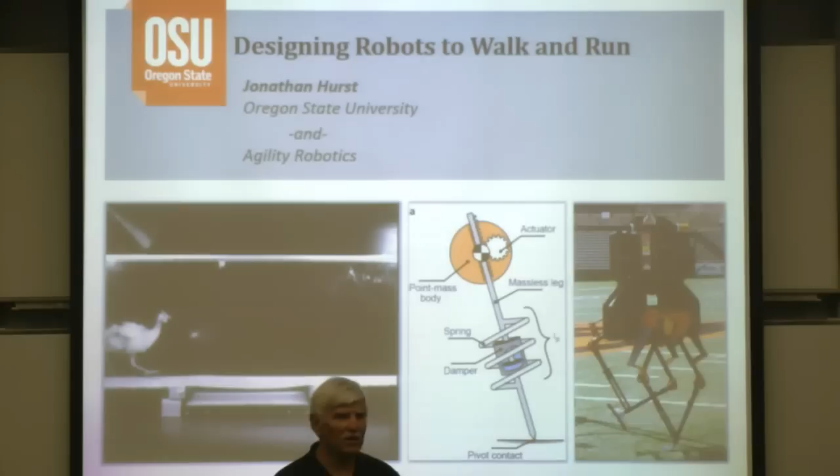Went on for his master's and PhDs, and he always was interested in making robots that could not only walk but run, which is another step above walking, of course. So I think it's time to welcome back to CMU, Oregon State University College of Engineering Dean's Professor Jonathan Hurst.

Thank you, Ralph. This is really great. I spent an awful lot of Fridays sitting where you are, seeing all the people from the robotics community coming through the Robotics Institute and giving talks. I sure have valued the education I got here and been building something smaller but growing in Oregon State along a similar mold. So I'll tell you a little bit about it.

So yes, I'm at Oregon State University. I'm also now CTO of Agility Robotics, where we're transferring this technology into a commercial product. This talk is primarily going to be about how we try to understand things from animals and not copy them. We're just trying to first understand exactly what's going on, exactly why it's happening, and represent that in some symbolic form, some math model, something where you can recreate the dynamics.

And then, based on an understanding of exactly what's going on with this reduced order model or with simplified models that we think might capture the physics of what we see in animals that we want to be able to reproduce, implement it on a machine. And this machine, of course, doesn't look physically or morphologically anything like an animal, because that's not what we're trying to reproduce. We're trying to reproduce the behaviors or the capabilities.

And our approach to reproducing the capabilities is to reproduce the dynamics. And we're building it out of electric motors and carbon fiber and things like that instead of muscles and bones. So I'll repeat that idea a bunch of times throughout the talk. I'll start with a little bit of background about myself, I think. Maybe.

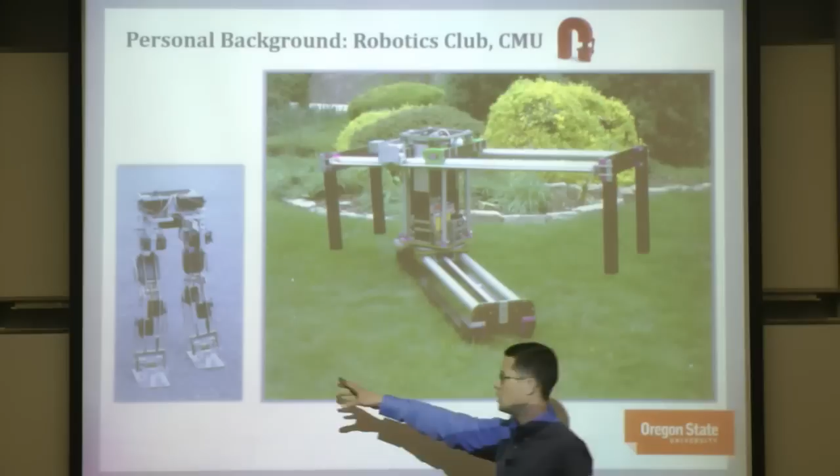There's the frame walker that Ralph mentioned. That picture was taken right outside of FRC. And a little servo-driven robot that primarily taught me that robots are hard. I mean, it did not work.

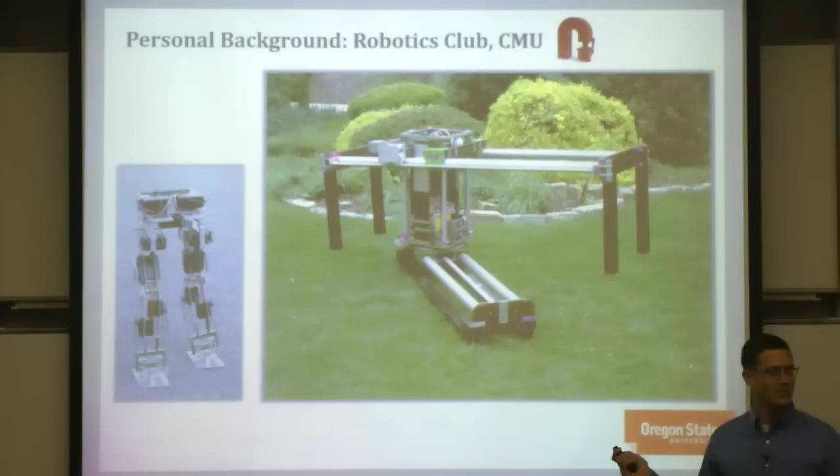The frame walker is still in the robot farm. Oh yeah, I think they mounted that up on the wall. Right above the 100-year-old lathe. Nice. It's not 100 years yet, but that was fun.

That was a lot of my life spent down in the basement of the Field Robotics Center building this thing for a couple of years. In Ralph's lab, I worked on this, the actuator with mechanically adjustable series compliance. The idea is that this is a joint, a knee joint out there, and like a thigh. This would be the hip joint. Prototype leg, where you can change the co-contraction of these antagonistic springs and change the physical stiffness out at the end.

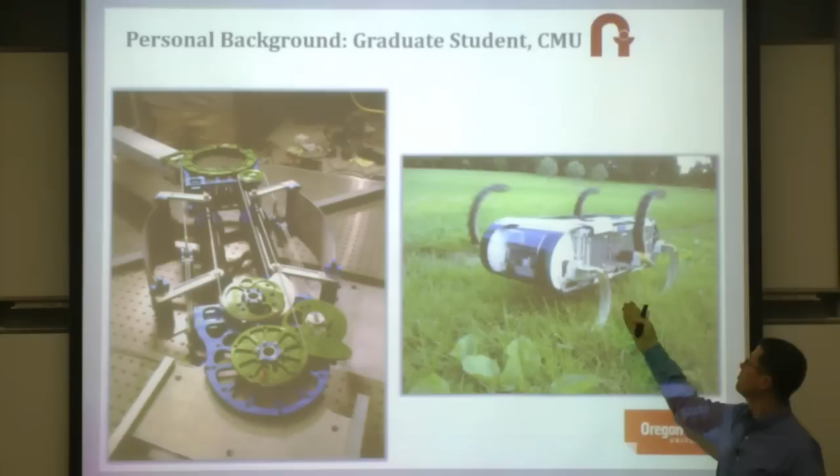Until I learned that there's no reason to do that for walking and running. But still, learned a lot. I also worked on the RHex robot. I just saw this one in Ralph's lab, but that picture is 10 years old or more. And that was great. And I built Mabel and Thumper.

This was working with Jesse Grizzle at the University of Michigan. The deal was I build and deliver a robot to him so that he can do controls, and he buys enough spare parts that somehow ended up in my lab that I get to have a monopod and hop that around and finish my PhD work and my thesis work with that. So then I spent a lot of time down here in A level in the corner.

So we're growing. We don't have, what do you have, 100? It's not a competition. It's not a competition.

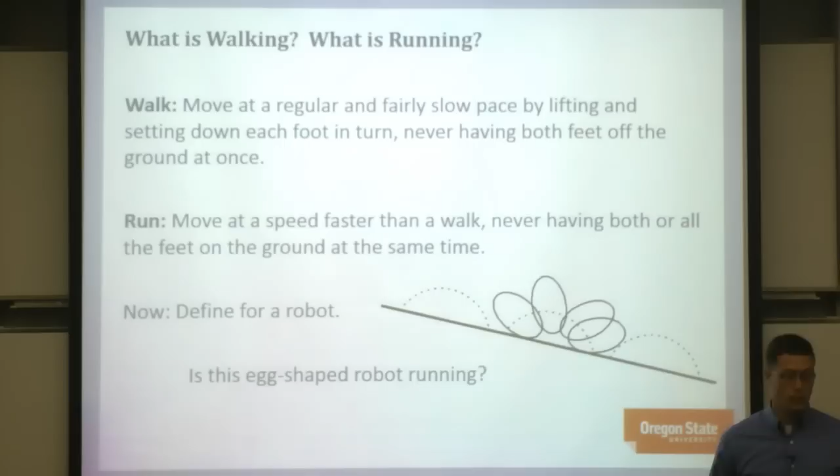So the reason I bring that up is because our goal is not to walk or run. We're not trying to make something that looks like an animal and looks like it's walking and running by some definition. We're trying to meet or exceed performance goals. And this is an example of a performance task.

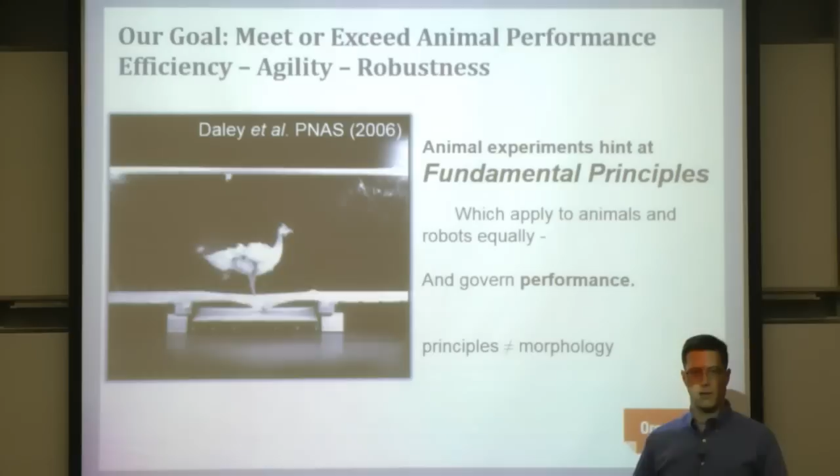This bird, a guinea fowl, is running down a runway that it's been down 100 times. A piece of tissue paper has always been over that spot on the ground, and up until this time, there's never been a hole there. It's been able to just run over that spot. So this bird has full confidence that it's just going to run down the runway, motivated by that broom that's chasing it.

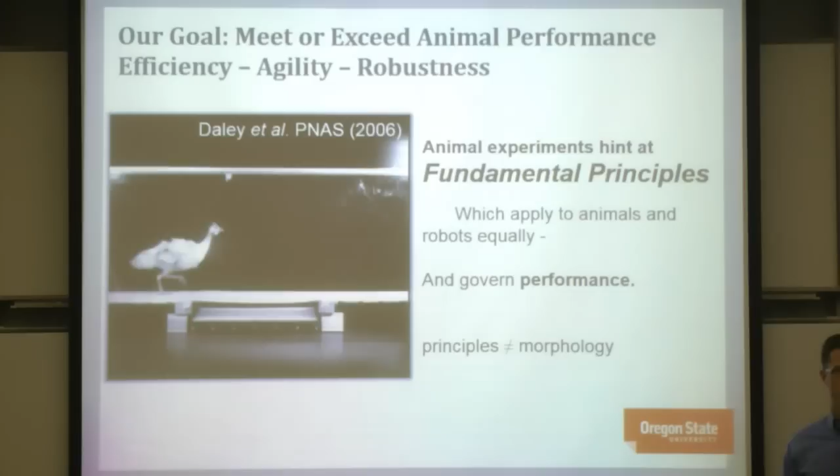This time, though, its foot just happens to break through. And you see it really doesn't disturb the gait hardly at all. I think that's amazing. The unexpected pothole is 40% of the leg length. And these birds run on birdseed. They're incredibly efficient, and they are very robust. They're versatile; they can go lots and lots of places. That's what we want. We want those achievements.

The way that we approach this is looking at how exactly it's able to achieve that, trying to hypothesize, collaborating with Monica Daley and other people in the community, to get out these key hints and principles about what they are doing. Fundamental principles like this should apply equally to animals or robots. So if you think you understand it in an animal, you should be able to reproduce it in a robot. I don't see why not. Again, principles and morphology are not the same thing.

I really think because walking is so familiar and you see it everywhere, and say a baby giraffe is just born and gets up and walks, people think it's easier than it is. But there are millions of years of evolution behind this. It's built in. It's built into neurons. It's built into the physical hardware. So how do you design and build something from scratch to do this? We just don't understand how to do it.

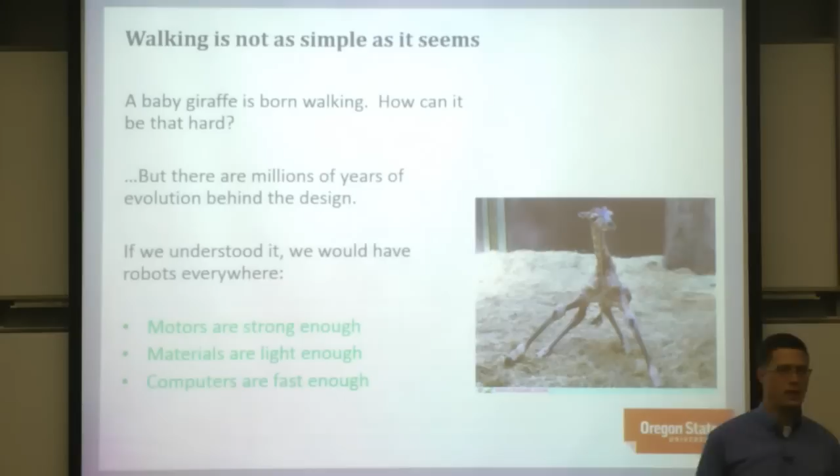I really think if we understood it, we'd be able to do it. Motors are more than strong enough, materials are light enough, and computers are fast enough. So it's not the technology, it's not the engineering that's the impediment. It's knowing how to implement it, how to do it right. We clearly don't understand it.

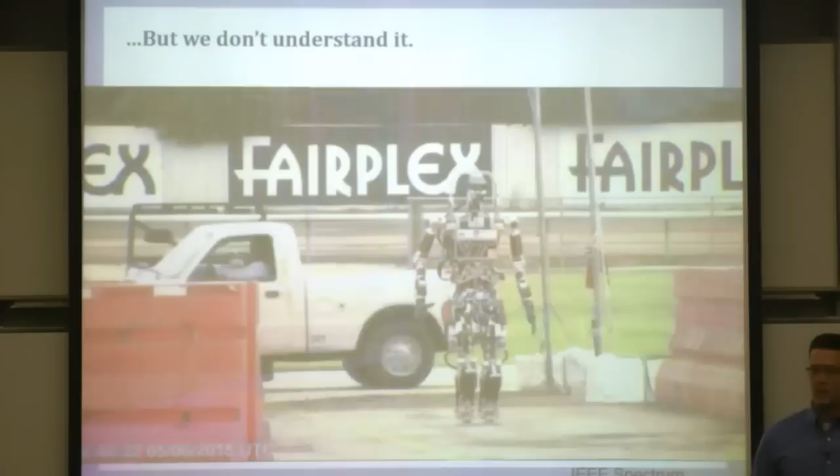You've all seen this, so I won't linger. But I'm sorry, they don't show that robot actually getting back up. This is still a great achievement. If you're a roboticist, you look at the whole thing and it's pretty impressive. But to the outside world, this is disappointing after watching movies. If we really understood how to do this, it wouldn't look like this. Okay, so skip the rest of those.

If we really understand it and can make robots that can go anywhere people can go with the same efficiency and versatility, I think the impact is going to be huge. We're going to see this in every aspect of life. Of course, prosthetic limbs, making people close to able-bodied again, or even better than able-bodied if the robot has a little more power, so long as it's actually behaving like the biological limb and is able to coordinate with your body well.

A lot of that is all about the dynamics and understanding the physics of how it works. Or exoskeletons. I imagine, I hope, I believe actually, that wheelchairs are going to be an anachronism someday. And you'll be able to put on fairly unobtrusive, lightweight exoskeletons and get around. But we're going to have to understand how to do that, how to not treat the person inside like a puppet, and instead be able to work with the biology right there.

But I think the biggest and the most important application that's going to affect the most lives, that's going to be as, I don't know, everybody's got a smartphone, it's going to be that kind of thing, is having the robots that can go in buildings and outside and just go anywhere. The mobility, solve the mobility problem of machines.

If you watch the first half of the movie I, Robot, it's really a utopia. It's really a great story. You just have to stop when all the lights turn red and don't watch the rest of it.

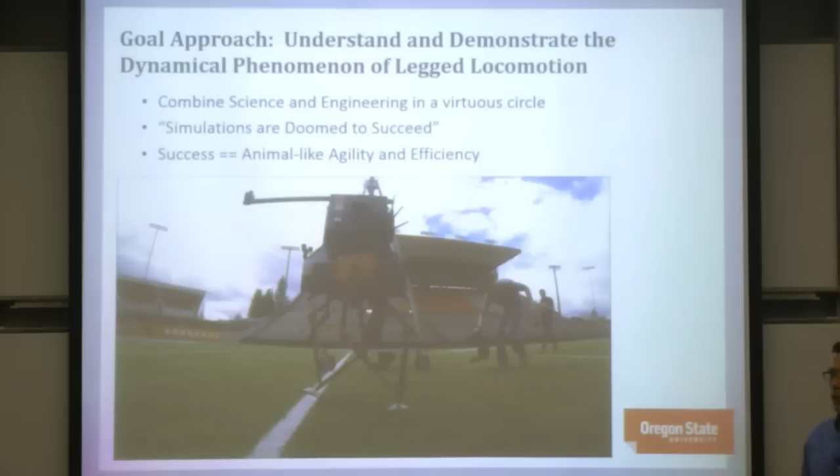And I worded this specifically, the dynamical phenomenon of legged locomotion. I think of legged locomotion the way you might think of how a mechanical clock works or a grandfather clock. That has inherent stability for timekeeping based on a pendulum or a spring and a mass. And that's something that exists whether you understand it or know about it or create it or not.

If we wiped out all knowledge of how a grandfather clock works, people would very quickly discover it and find that a pendulum keeps time and things like that. I think legged locomotion is exactly like that, but it involves springs and masses and a lot more complexity than something like a grandfather clock.

I don't think that you can explore this very well in simulations. I've seen many simulations of successful machines walking and running around, and if you dig down enough, you find some simplifying assumption that isn't feasible or realistic. Doing it on a machine forces you to go in certain directions. So I think we're just beginning to really understand this integration of passive dynamics and applied control and how it applies to legged locomotion in particular.

Now I know a lot of you in this room, this is probably old news. A lot of you I've seen at conferences, so you've probably seen me say this many, many times. But just to be clear for everybody in the room, the passive dynamics are any behavior when the power is off. If a person is unconscious or the power is off, however your machine operates, the inertia of your rotors, any stiffness in the system, any friction in the bearings, any backlash, that's all passive dynamics.

That passive dynamics can either help your task and contribute to achieving what you're trying to achieve, or it can be an impediment and really get in the way. And so when you design a robot without thinking about your dynamic behavior, you design it with kinematics first, then you say, now I will build a model of my robot and try and control it. The odds are that those passive dynamics are going to be an impediment and a problem that you have to try and control around.

Applied control is, of course, the little additions that you give. So that's my daughter Jane. And on a swing, you learn to pump the swing. That means you have to give it just a little kick each time. It's not a lot, but you're relying mostly on the dynamics of the pendulum in order to create the particular motion that you want. You're not intentionally creating this trajectory or doing path planning for a specific trajectory.

So I think similarly, it's kind of crazy to try and do trajectory following for a walking robot. It's just not like that. It's a dynamical phenomenon. Another one of my favorite.

Yeah. Oh, can I ask you a question? Okay. Thank you.

So you mentioned that you don't have to do trajectory following. But obviously when you're swinging freely, it's more of a natural phenomenon. But if you're walking on steps, or if your daughter is jumping over things to get to a destination, doesn't she have to do some planning?

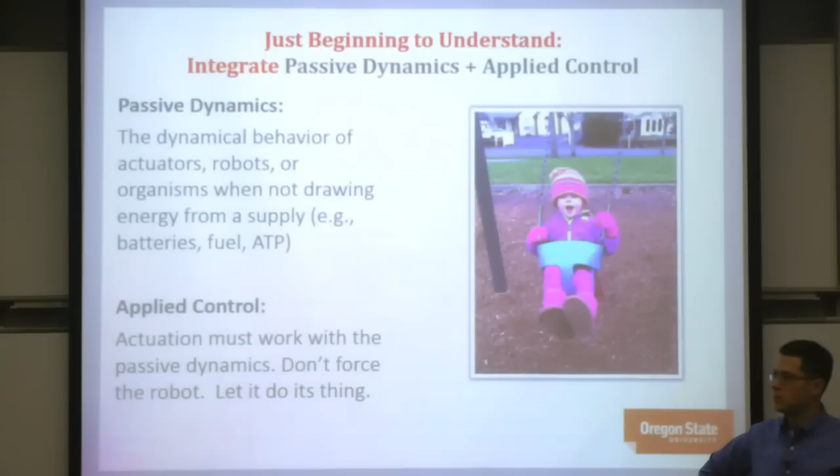Sure, planning is involved, but I think it's more like Mike was showing me in Ralph's lab at the BallBot, where you think about planning through your dynamic state space. So you have to know what the dynamics are of your machine, and you kind of want to create the dynamics of your machine to help do what you're doing.

So she has some trajectory here, which is probably phase locked in some way to the passive dynamics, and picks a time to trigger when you choose a trajectory for the pumping of the leg. So there's always planning, choosing when you're going to do that, and there's probably trajectories, but it's not the high-level trajectory of 'I want my swing to do this thing,' and then forcing it to do that, even though applying torques to the bar may or may not fight with the passive dynamics of the pendulum.

So what I'm trying to suggest here is that all of these dynamical systems are going to be an integration. They're going to be a partnership between the passive dynamics and the controls. And it's very important to think carefully about what passive dynamics you want for the task you're trying to achieve. Does that answer the question?

Great. Okay, so I think I've got a couple of videos here that I think really illustrate that combination. I think this guy is obviously aiming a little bit. You can't miss, you have to catch. But it's a pendulum, and notice a couple steps at the top right there.

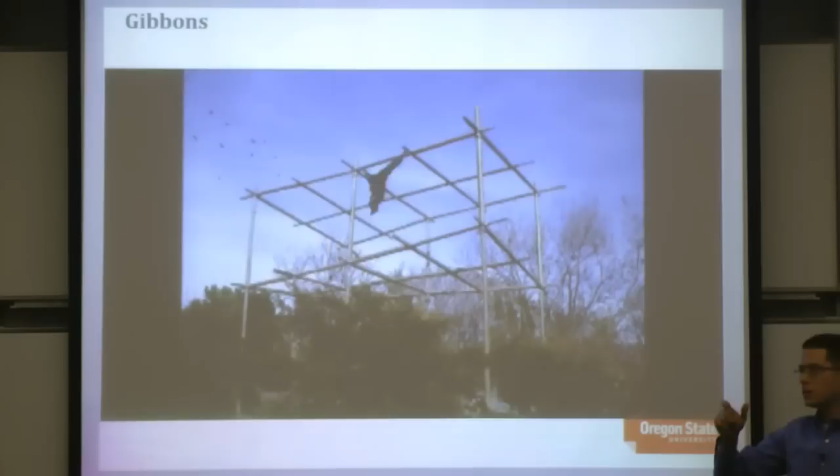It swings from brachiation to walking. It shows, I think, a lot of similarity in the springs and the pendulum between those motions. They're very, very similar.

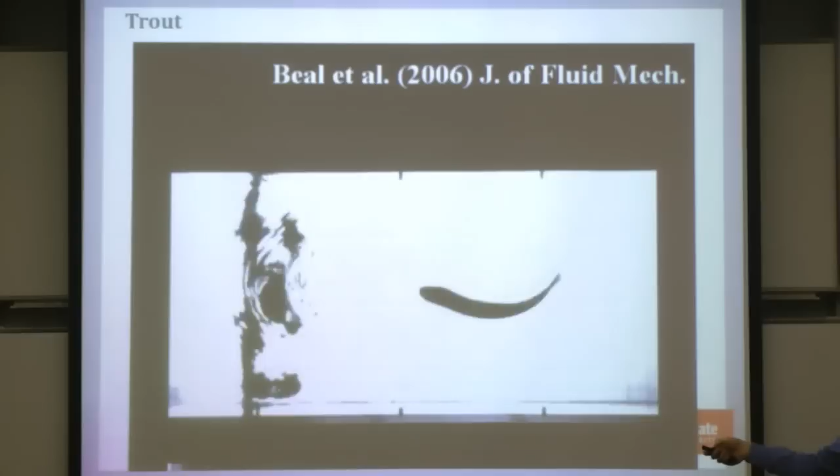This fish is 100% passive dynamics because it's swimming upstream - there's a little rock right there. It's actually dead, it's a dead fish that's swimming upstream. And if it had controls, it would know to just kind of nudge itself and nudge those passive dynamics to keep that under control and keep that going in the right way. But it's dead.

So specifically for legged locomotion, these are the passive dynamics that I would like to tell you as fact, but I expect a few people would argue with me in this room. These are the passive dynamics that I believe are the foundation of legged locomotion: this spring mass behavior.

Now, this theory showing that the bipedal spring mass model can reproduce the characteristic ground reaction forces for walking and running, that was Hartmut Geyer - in 2006, that's not that long ago, is the very first time anybody ever said that. That's amazing to me. This is a theoretical result that even though people have been thinking about walking and running for centuries, probably millennia, I think this really kind of cracked open an idea that's important.

Now, we looked at ostrich, turkeys, guinea fowl, pheasants, and quail. This is with Monica Daley. And look, this was hundreds of experiments, hundreds of runs of data.

And my student Christian Hubicki put together this very simple reduced order model with the idea that birds don't actually look like this, or animals in general don't actually have this perfectly symmetrical spring mass gait. There's always this little tail going right there. So what's our theory for that?

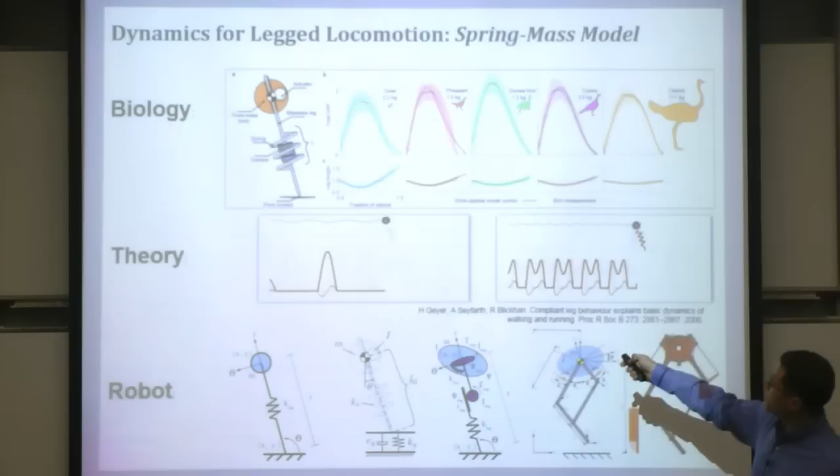And a little bit of damping - everything's going to have a little bit of damping. He put together a really simple model with a little bit of damping and an optimal work actuation in series with that damping, and showed a very good match to this data for this huge range of birds. It doesn't prove anything, it just says here's a model that can reproduce the set of data that we took. But it's our best guess that this is capturing the real physics of what's going on in the system.

So that's what we wanted to show with the robot: is this just a model that maybe reproduces some behavior, or is it actually capturing the physics and the fundamental principles behind it? So we start with a simple model, get a little bit more complicated, a little bit more like a robot, and we end up with our prototype robot leg.

So here I'm going to make an argument. This is straight out of my thesis.

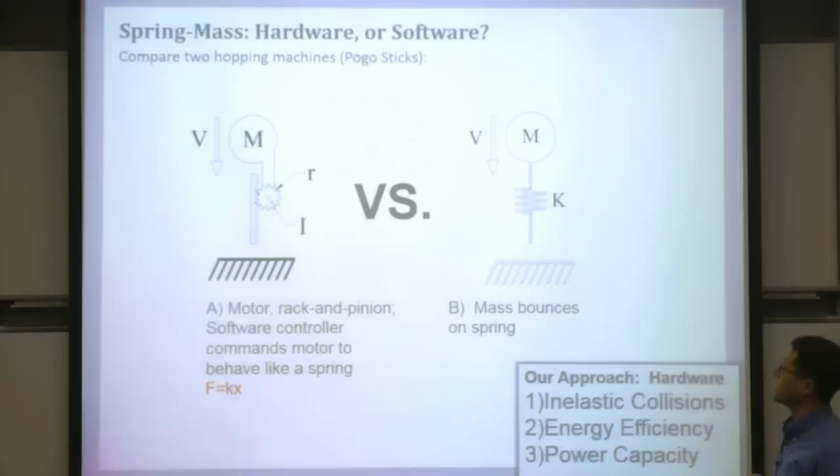I've made this argument for years and years, but it's important to keep repeating. The question is, do you want to create this spring mass behavior we just described? Maybe I've convinced you this is an important foundation for legged locomotion.

If you had really great actuators, you could control that behavior in software and get all the behaviors you want. Maybe the spring mass is the way to do it, maybe something else is. Or you can build it in hardware, in which case you're absolutely stuck with that passive dynamics behavior. And if that passive dynamic behavior gets in your way, tough, it's just going to limit your abilities. So there are definite trade-offs between doing it this way.

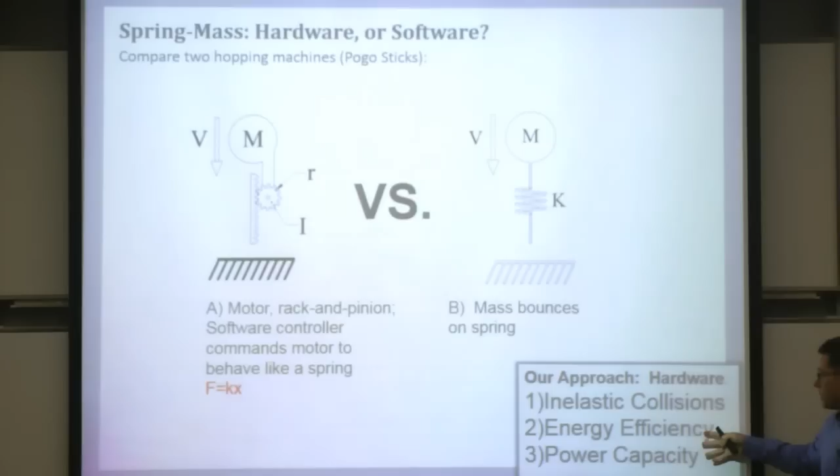I want to tell you why we do it this way, why we put the spring in the hardware and implement the passive dynamics through the physical system. Basically, it's about the collisions with the ground, energy efficiency in the system, and power capacity.

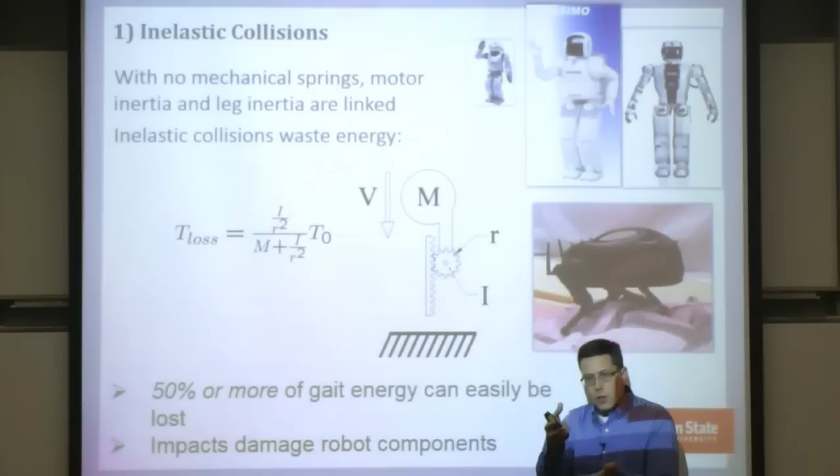Starting with the inelastic collisions: if you ignore any sort of mechanical springs and think about this simple system coming toward the ground with this velocity, here's your motor and a gear, and it's not spinning at all. At the instant before impact, it's stationary. The instant after impact, it has some rotational velocity. That's an inelastic collision, and that equation describes the energy loss to that inelastic collision.

On something like Asimo, with a little motor and a 100-to-1 or 150-to-1 gear ratio, the reflected inertia, the effective inertia you feel, is about the same order as the mass of the robot. So you lose more than 50% of your energy at that instant of collision. That's ignoring the fact that you get a very large force spike that's likely to break a lot of things. So when Asimo tries to run, it's very hard on the robot just from those inelastic collisions.

It takes a lot of power too to get you off the ground. I'll get to that.

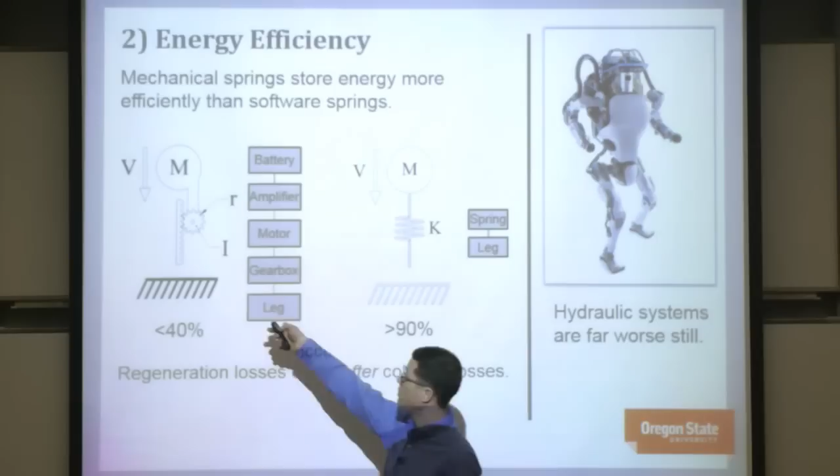Energy efficiency: if you're trying to do regeneration, remember, after your collision losses you still have maybe 40% of your gait energy, and that's in the velocity of that motor spinning now. You want to reduce that speed and then accelerate your robot back, so you want to take that energy, store it, and give it back.

If you need to go through your gearbox, your motor, your amplifier, chemistry, and battery, and then push it all the way back out, your efficiency, if you're Sangbae Kim, is pretty good, because he was very careful about all this on the Cheetah robot. For most people, that's in the 10% range - it's very hard to get that efficiency to be decent. On a spring, if you're Ben Brown, you get better than 90%.

And then the power capacity is really a compelling argument. When you lift off the ground and you're bouncing, that's high force and high speed - it's a very high power motion.

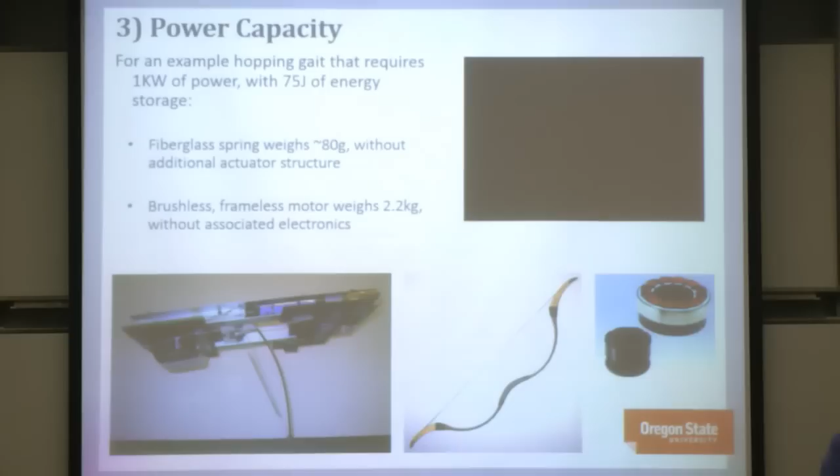For a tiny little spring, you only need about 80 grams to do something like 75 joules - I chose something like a 60 kilogram robot hopping a certain height just so I could do the comparison. And a motor, just the motor, without housing or bearings, is about 2.2 kilograms to get the same power output. It doesn't make sense to try to generate your power output with an electric motor. It makes a lot more sense to use springs to do what springs are good at, like high power, and use motors to do what motors are good at, which is continuous power output.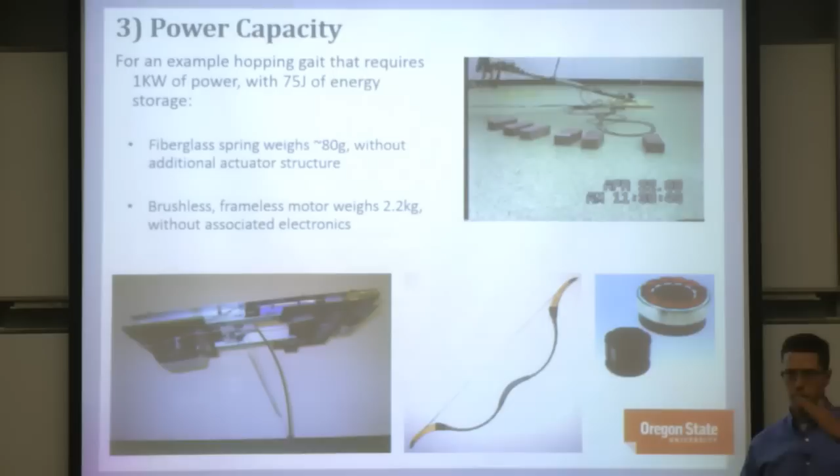Hopefully you've all seen this before: Garth Zeglin and Ben Brown's robot from a while back. This and the ARL Monopod 2 are kind of my background. I don't really buy in much to the humanoid robots.

So I've already said this is our approach. Others have taken this approach too: passive springs in there and a very small motor to kind of keep that passive dynamic behavior going.

Back to Marc Raibert doing this stuff with air springs and hydraulics - look at what that did, no robot's ever done that since. It did a flip. Now when was this, 1994? And they had robots running at 10, 15. Why isn't everybody copying this? I don't understand. People still build humanoids that do this kind of walk, and I don't understand.

So this is our machine, ATRIAS. The whole concept behind ATRIAS is that we have a simple math model. That's the model that we think we understand, that's capturing the physics of what animals do, and that we think we can control. Let's build a robot that is as close as physically possible to that model, be about human scale, and be out in the world. And that's where ATRIAS comes from.

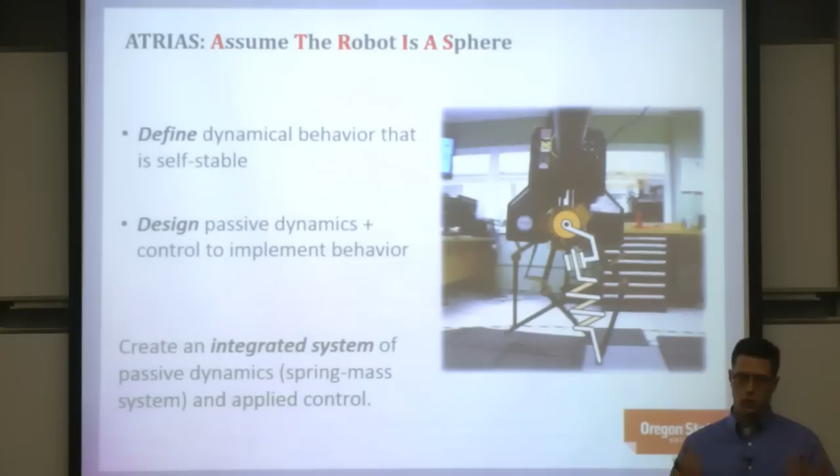Assume the robot is a sphere. The idea is we really can just assume the robot is this simple dynamic model, apply the controller to the simple dynamic model, and it's going to work on the robot. That's the idea.

Define the behavior that you want, and then design the passive dynamics to work with your controller to integrate that behavior. So it's very much an integrated system.

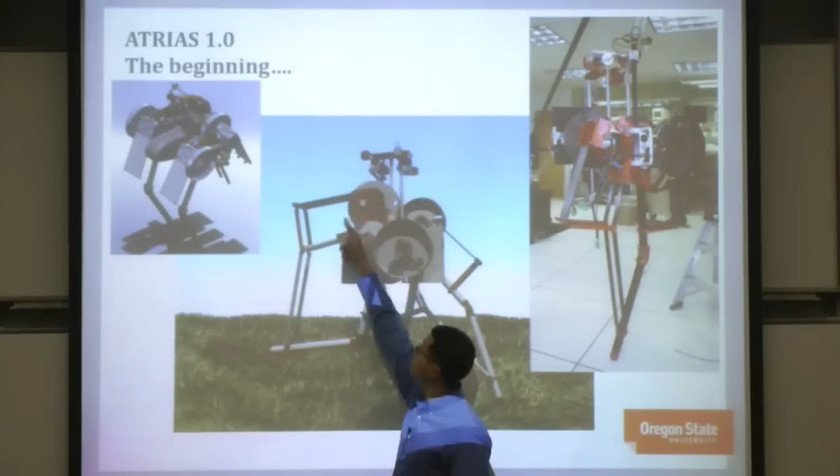In the beginning, when I first got to Oregon State, this was a cable drive. The motor is here in the center, large pulleys here, and then these are a step down, and they spin around the motor housing, like a planetary gear. It's all cable drives, no gears anywhere on the robot.

We built a prototype, and we did have this hopping around the room. Now the problem with this machine is this whole dinner plate sized pulley sweeps all the way around here and all the way back. It's very difficult with the robot if you want to do adduction, abduction, not even turning, not even yaw. There's this huge keep-out space where these dinner plate things are spinning around. We can't figure out where to put a body on this thing. There's just too much space.

It was too big. It was a problem to do cable drives. We could not figure out how to get cable drives into a form that would work. So we reverted to these harmonic drives, which are terrible. I hate harmonic drives — 60% efficient or something like that in our application because they're small, with very high torque capacity and so on. But they did work. They did get the job done.

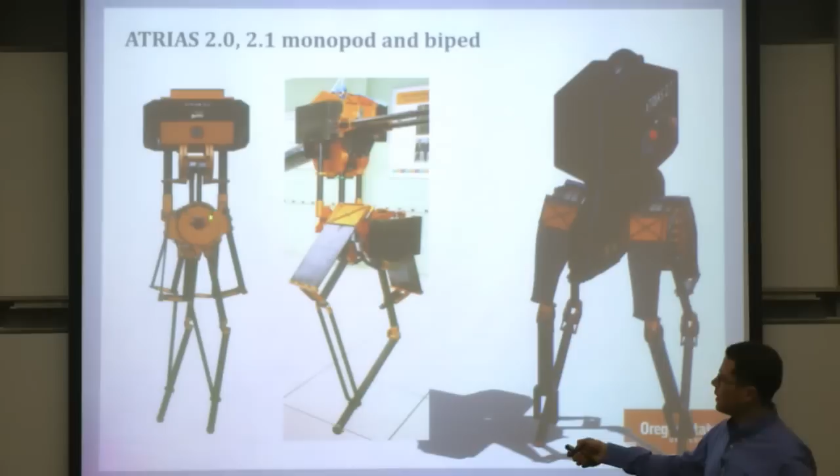So we have these big motors in there from Emoteq right in the core, and then this 4-bar linkage for the leg so that the leg can extend and retract like this and swing back and forth like so. And these big plate springs, fiberglass plate springs, for containing the energy of the running gait.

Started building. There were a lot of parts, a lot of machinists, and we made three of them. One of them, many of you have seen it in Hartmut's lab. One's at the University of Michigan, and we have ours still at Oregon State.

We traveled a little bit with it. We did take it out to the Royal Veterinary College and do a photo shoot. This is the runway — had the robot run, and I think this was the first time the robot walked outside. The reason we had the robot walking outside this early in the project is because they couldn't, for some rules or reasons, get the rope attachment to the ceiling for the boom. So they took it outside, wrapped a rope around a tree branch, and just walked around out there.

It worked. Okay, now I get to the actual technical content of the talk. I've given you the background, I've given you the foundation of what it is that we're trying to do, the approach we're trying to do. And I want to tell you how we control this thing.

It's a lot more based on understanding the physics and having that understanding of how you want to control the physics and the passive dynamics than it is about a closed form controller. Now there's a lot of detail behind this — a lot of pretty good control theory and computer science that my students do, because I don't know how. But I do have good intuition for the dynamics and how these things move. And these are the key pieces that enable the robot to function.

So to start with, of course, we made a spring mass model, with near massless legs — that's why our motors are right here. These are very lightweight carbon fiber. The leg springs, the mass is concentrated all right here. The center of mass is right about there. We couldn't quite get it down to the middle just because we needed our computer and batteries and everything.

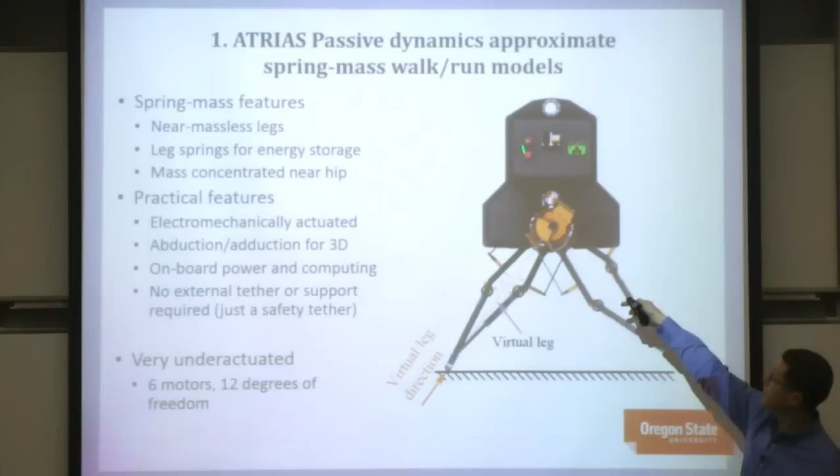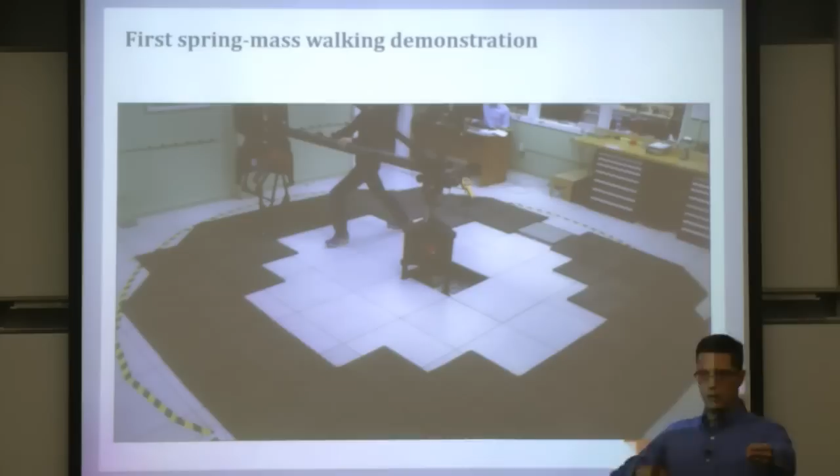Practically though, we have motors, we have adduction, abduction, which is not part of the model—all the overhead you need to keep a robot going. In this very first demonstration, he's holding the length of the motors constant, so the motors can't change leg length, or at least the tight PD control is holding leg length constant, and applying zero torque at the hip. It also follows kind of a clock that matches where you are on the gait and keeps the other foot there, which is why he has to push it to walk around. So that's all the controller is doing: zero torque at the hip except for placing the leg and holding leg length constant.

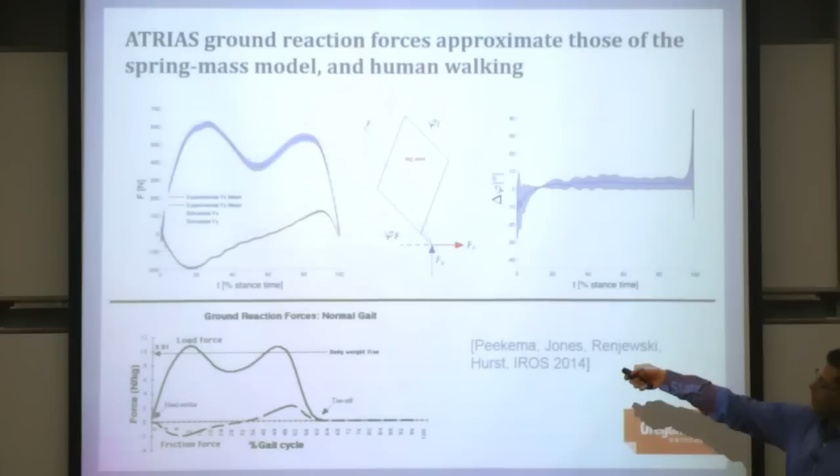And there's what we get. Just using the spring mass behavior, pushing it around the room, we get the characteristic spring mass walking gait behavior. That dotted line is what you get from the theory, the solid line is what we get from our robot, and that's what you see for a person walking.

Now the first thing I get a lot is, who cares? So what, you've demonstrated something that looks like a person, but why does that really matter? Well, it matters because of what it can do, but I'll get there.

Here we are doing the first passive hop. Same idea, holding the leg length constant, holding zero torque at the hip, and just throwing it. Looking at the ground reaction forces, there's what a person looks like—they have a heel strike. Our robot doesn't have a heel, so we don't have the heel strike, but for the most part it's pretty close to what this spring mass model does.

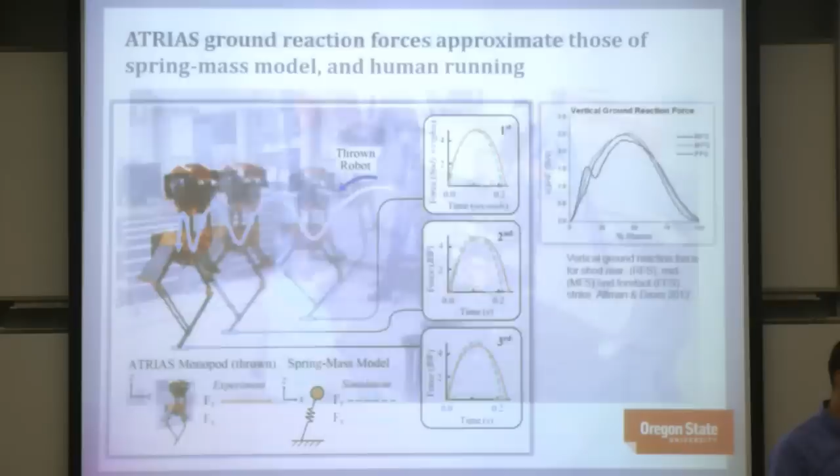So that's just to show step one, the robot is a spring mass system. Step two, we had to mix time-based control and state-based control. There's a lot of flexibility in the robot, and if you try to do closed-loop control of this thing, it's very hard to have enough bandwidth with your actuators, given how much inertia they have, to take any oscillations out of the springs. So we don't even worry about it.

What it's doing is just stepping side by side, which is a feed-forward clock trajectory. Maybe some people would call that CPGs—I had lots of names for it—but it's just a time-based controller tied to state-based control. In this case, the state-based control is the velocity, so it places the angle of the leg based on the velocity of the robot, and it just stands there and steps side by side.

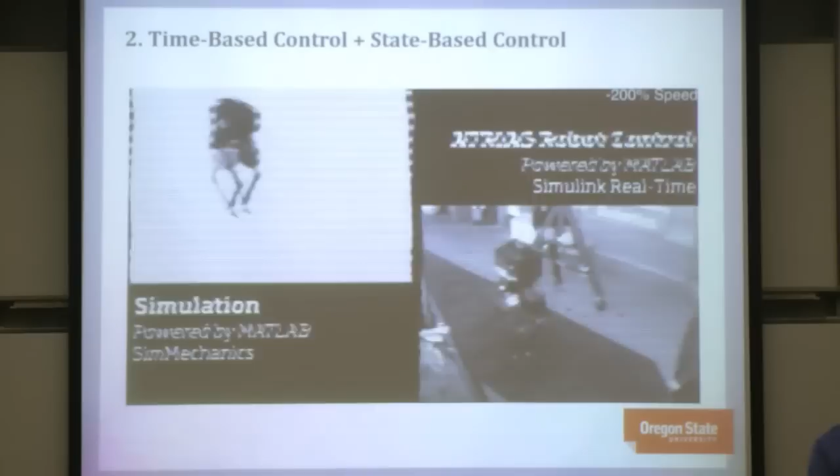Now it has no feet, so it has to do that. If you had no feet, you would also have to do that, and you can try this by wearing stilts. To visualize what it's like to be the robot, wrap yourself in a carpet so you can't see anything, so you can't use your arms, so you can't really bend your body very much, and wear stilts. Then let somebody randomly kick you every now and then. If you have all of those caveats, the robot does pretty well—people can do about that well.

Hybrid transitions are a real challenge. Have many of you run into this before? At some point you're going to have an impact and you need to change your control from one phase—until after the impact, a different phase, a different control method.

We don't have any sort of toe switches at all here. We do a very gradual transition. We have the swing phase control and the stance phase control, and they're different. Both controllers are always running, and each has an influence proportional to the amount of force being applied on the ground, because we can measure that force.

In the swing phase there's very low force, so the swing leg control is really the one that controls the torque on the motors. When you pick your location, both controllers' desired trajectories are pretty much tangent—about the same for a good region at the start and end of the stride. So it doesn't matter when you hit the ground; if you hit early or late, the controller was going to do the same input anyway.

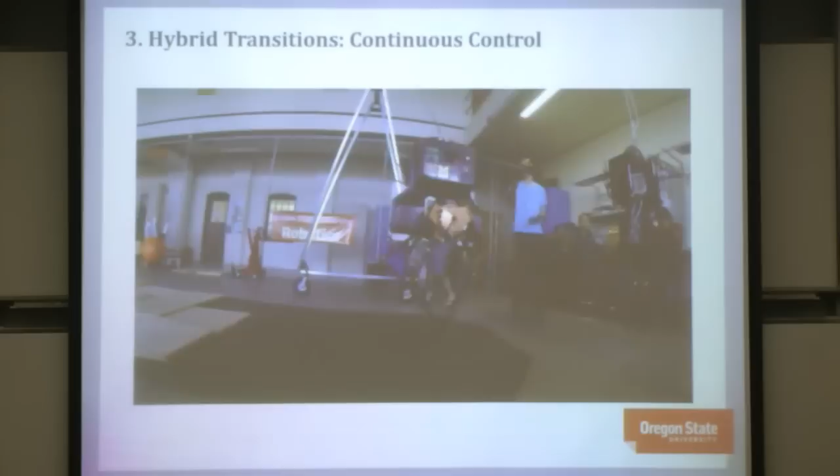And just based on the physics, the behavior or the response is going to be different because now you're applying forces or you're not, but the controller is not doing anything different. So there is no discrete transition at the hybrid transition from swing phase to stance phase. So it doesn't know that these obstacles are here. We just tell the robot that there's flat ground, walk forward, and then it goes. And you can handle quite a lot of disturbance that way.

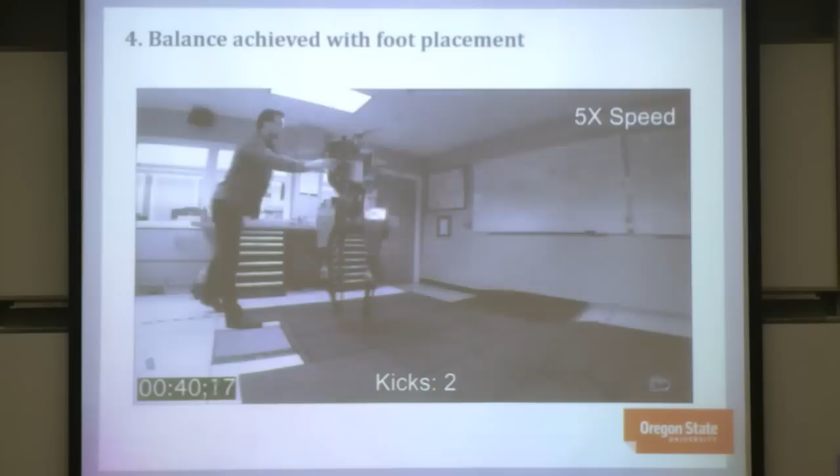And this is showing that if you think about the velocity vector and just visualize how that velocity vector changes. When it gets a kick, the velocity vector increases. And then in your mind, think a direct proportional controller between velocity vector and leg angle. That's it. Very, very simple. We're controlling the leg angle based on the velocity vector of the center of mass.

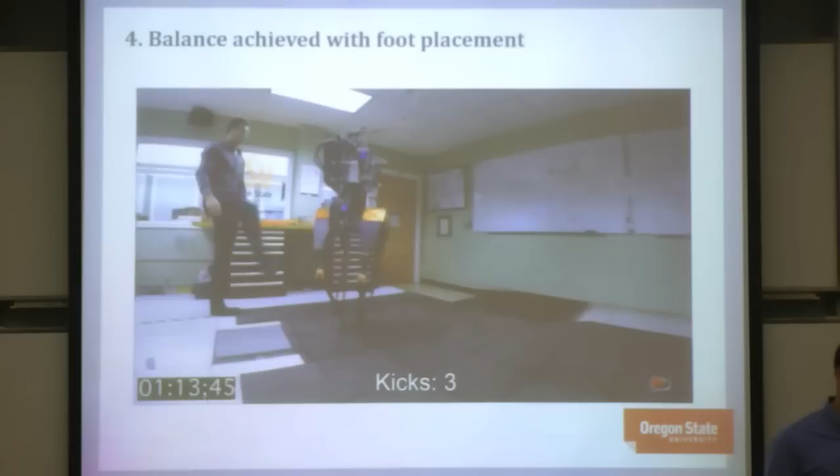Now, calculating that velocity vector is less easy. It has to do with measuring the angle of the body and the proprioception of the rest, and filtering out a lot of the vibrations and oscillations and things.

And energy regulation. Now, we thought a lot about this, about how do you control your velocity, how do you control your hopping height, how do you control the different features that you might want in a gait. And what is really the one thing you care about is probably the amount of energy in the gait. So you think about this from the spring mass point of view. The spring mass system is energetically conservative. You're just redirecting that energy all the time between the spring, the gravitational height of the center of mass, and the velocity of the robot. And so you want to steer that energy through your system.

You can control your hopping height by changing your forward speed. So slow down your speed and your hopping height is up high. You can then transition all of that to forward speed. And I've seen this at the aviary, the National Aviary here.

There were a lot of really tame birds, ground running birds, and they like to come out, but when they seem a little bit threatened, like I saw a kid coming up behind me when there was a bird right there, the bird slapped the ground and started hopping, which I thought was so strange. And then when the kid moved, one leg angle adjustment and the bird was off in the bushes. So it put energy into its gait, all in the vertical hop, then steered that energy into the velocity.

So if you really want to change your speed, you want to change all these things, you've got a couple of dials, and one of those dials is changing the amount of energy in the gait. And when do you want to change, and how do you control that energy in the gait? It's very hard to do state control where you're measuring the whole energy of your system through feedback. We just add a certain amount every time, and you always want to add it in the last half of stance, because that's when you're pushing yourself the direction you want to go. That's when you're not absorbing it into your spring, which is not the most efficient way, but putting it directly into the gait, and so on.

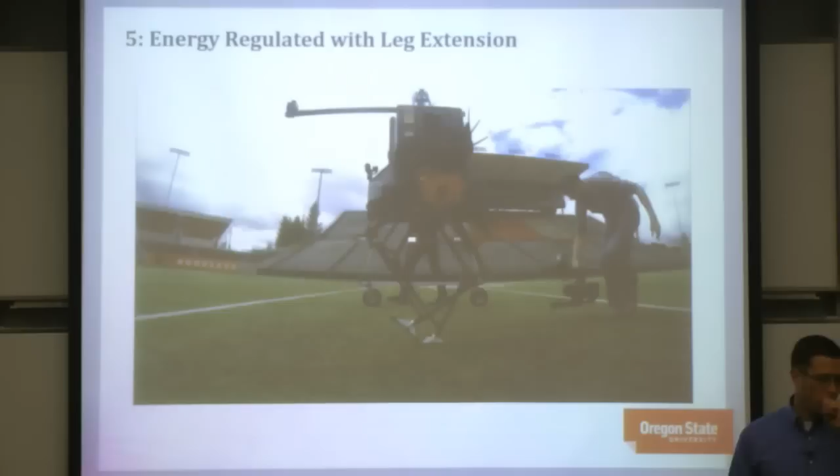Now, one other thing about how to control that energy is dissipation. We ended up with very light gains in our PD controllers with a fair amount of friction in the transmission and a fair amount of damping, and it worked so much better. Before we realized this, it was serendipity.

They put a much stiffer spring than it was supposed to be on there, and had very soft gains because there was some problem with it being unstable, and all of a sudden something clicked and it started working really well, and we realized being able to absorb and toss out unwanted energy inputs from all over the place, that's basically the definition of dealing with a disturbance. And if you're just adding energy with every stride, now yes, it's less efficient, but it's so much more stable. And so that's a direct trade-off.

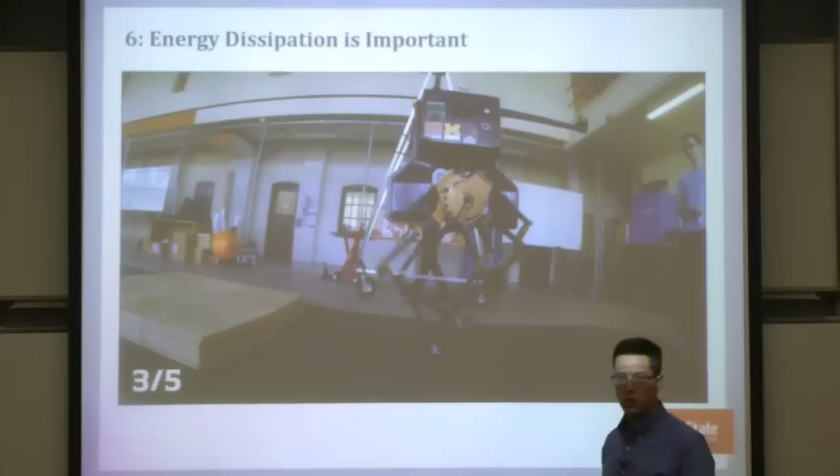So in this video, again, the robot thinks it's going to walk over flat ground. We've changed the gait just a little bit so it's stepping higher so that it won't just trip and fall. But there's no planning, there's no vision, there's no knowledge of the obstacle.

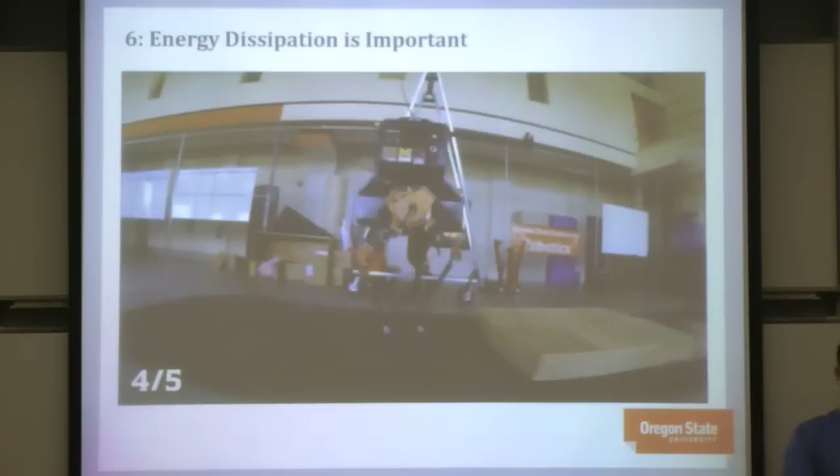And you can see the foot didn't even catch the edge quite right. It just slips off or catches it a little bit wrong. When it lands, it takes just a step or two to recover because it's absorbing a ton of energy. You see it catch its toe right there on the edge, just kind of a weird, happened to catch it in a funny place. Went up too high, loses that energy quickly within a step or two. It's still got a pretty good bounce on the second bounce, and then same thing.

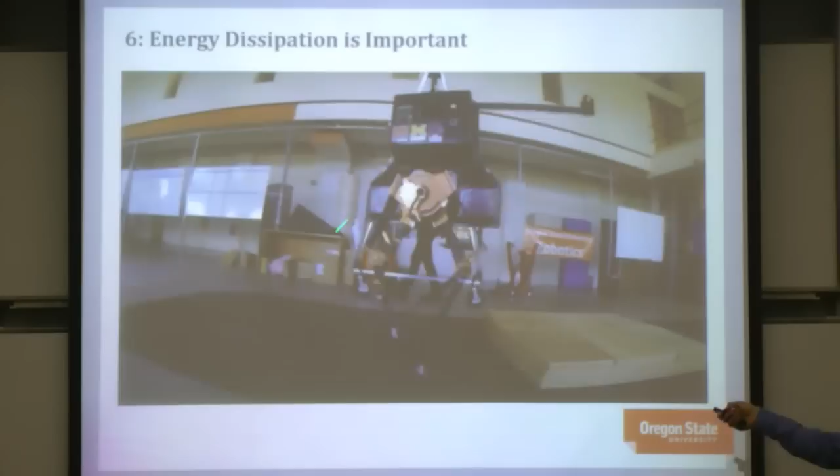And that's very similar. Now, we haven't actually looked at the data, but it's pretty similar to what you'd see in a bird taking a big disturbance and taking a couple of strides to just kind of bleed out that spare energy and kind of settle back into a gait. So energy dissipation is actually really important. And that is one of the big lessons I learned on this project.

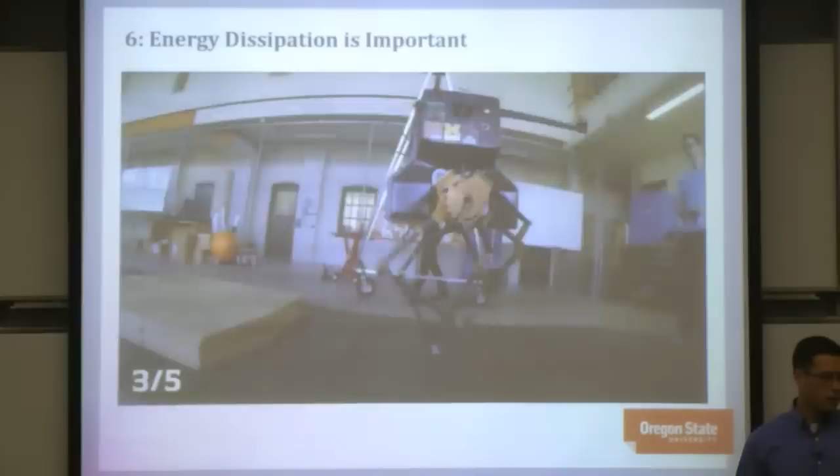So bringing it all together, like I said, when the leg force is low, you say, okay, I'm in my swing leg. So it's a time-based leg extension. It's just following something like a sine wave. It's some trajectory. And there's some angle for the leg that you choose just based on your center of mass, and that's both in the adduction-abduction direction and the fore-aft direction. Just predefined trajectories for the swing. We just have a trajectory that's some spline that we kind of made up. Can probably be better or worse. I'm sure we can work on that a little bit.

In the stance controller, just when your force is high, you only apply torque at the hip to keep your torso up. That's the only reason. Generally, you want that torque to be 0. You hold your leg length position. Soft PD gains allow you to have a fair amount of damping in the system, and you can control how much of that damping you want if you do it in software. And there's no energy benefit to putting your damping in the physical hardware, so that's one choice where I don't want that to be passive dynamics. I want that to be in the applied control. And then I extend the leg length set point towards the end of stance to add energy, and I can vary how much I do that depending on how much energy I want.

Now this is a pretty important point. At the very beginning, remember I said, ATRIAS, assume the robot is a sphere. We can make the robot behave like the simple spring mass model, and we can control the spring mass model and it'll do what it does. That failed. We spent at least 2 years working with a number of different controls theorists and people in the community. We tried very, very hard, under the gun with a lot of pressure, to force the robot to behave as close as possible to the spring mass model so that any of our leg trajectories and leg choices that work on the ideal SLIP model are going to work on the robot. And it just was not stable at all.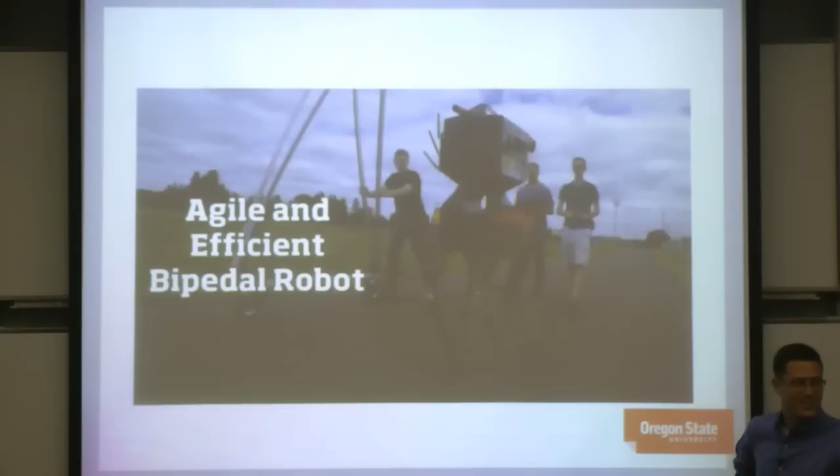I had a graduate student who spent a lot more time than he should have on creating nice videos for us. I can't believe they let you on their football field. I know, me neither. I think they don't understand how much robots can tear things up. And we don't really want to teach them, so it was fine. Yeah, athletics thought it would be pretty cool, and it was.

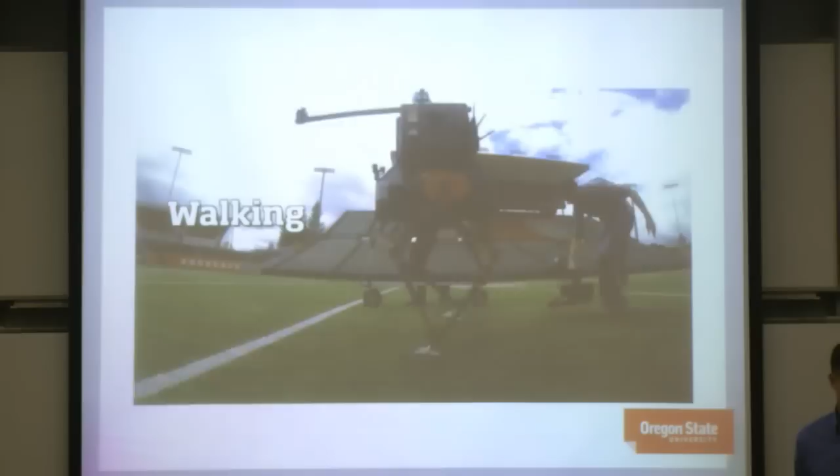It's open license music even. No copyright infringement.

So Jonathan, while this is playing, if we were to go into the future 5, 10 years from now, what will this video look like? What's the cool acrobat you're going to show? Let me answer that question later. I'll answer it though. In public or private? Right here, in like 2 minutes.

So this is our achievement. This is why we built ATRIAS, to show that we can actually implement the physics and that the model reproduces the physics and the principles that we're trying to achieve. It's not just a superficial mimic of a symptom, a separate physics that's reproducing the same symptom. It really is capturing the physics we're trying to achieve. ATRIAS is the first robot to ever do this for a walking gait.

And the thing that's really cool too is that we didn't control the ground reaction forces to do this. We had a few months to make the robot work when things started to come into place, and we were aiming for the DARPA Robotics Challenge. We were walking, we hit all those obstacles. We came back and said, hey, let's see what the ground reaction forces look like. And they're doing that. So I think it's a direct link, I don't know, correlation anyway, that having something that's really capable is going to look like that.

I was going to ask this question later, but I feel compelled to ask it now. So you made a very interesting point that you built a robot, this magical thing, and then you said, oh, what will the ground reaction forces look like? And it somehow seemed to match humans. Does it mean that you are fantastic at building walking robots, or does it mean that there's a lot of play in the design space of walking robots that even if you made ATRIAS different, it would still produce a profile that looks like that?

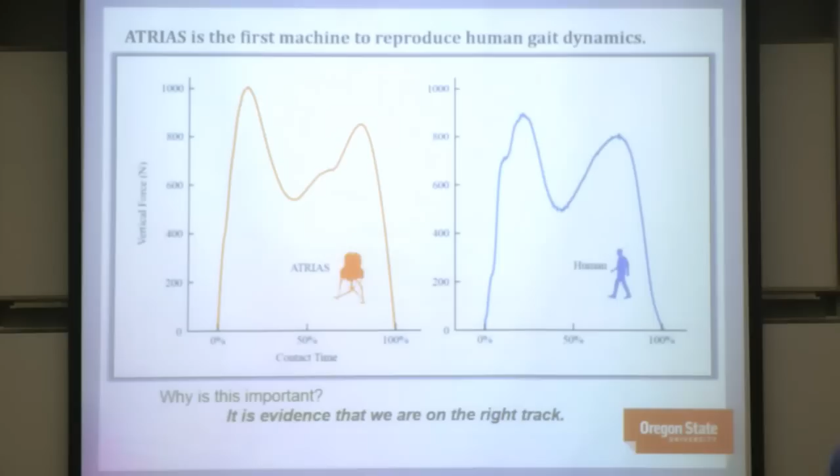There's a lot of play. You can design any number of different machines. If they generally have this spring mass behavior, that's the key, having the passive dynamics be about right, and then some of these controls ideas that I talked about, you'll get this. And the other thing that's cool about it is you don't have to think very carefully about how you're going to do the transition to a running gait. You just add a little more energy, and this ground reaction force flattens out and then turns into a single peak over several strides. It's evidence that we're on the right track. That's why I think this is important.

Do you have numbers for the all-up system comparing cost of transport between ATRIAS and Sangbae's Cheetah? I called them out earlier. Not right off the top of my head. So ATRIAS takes something in the vicinity of 400 watts. It's 160 pounds. Cost of transport is in the vicinity of 1. Sangbae Kim's reported numbers, I can't remember. I want to say we did a little bit better, but we measured our cost of transport based on electrons coming out of the battery to power everything in the machine.

And I think Sangbae measured it based on the current that was going to his motors from the amplifier, not including some of the overhead of the computer and things like that. I'm not exactly sure. He has a really nice system. It's pretty efficient. This has a slightly different approach using the passive dynamics. Also really efficient. Does that answer your question well enough? It is a lot better than any hydraulic machine, just fundamentally. And there's really nothing you're going to be able to do about hydraulics to make it comparable to this.

So that's why this is important. It's not that this is a meaningful goal in and of itself. It's just evidence that maybe this is on the right track. So coming up next, ATRIAS is retired, and we're building a new robot. This was a render from about a week ago. It's our first time we've got all the pieces together in one assembly. We aim to finish this robot and have it moving and walking around by the end of this summer.

The features that are added, if any of you are curious, this leg configuration is very deliberate. It is absolutely not intended to look like a bird. It's just that's what happens when you have the problem of antagonistic work on ATRIAS, then have your graduate student do a bunch of math for a year, and then calculate configurations that for a running gait are going to avoid one motor doing work on the other. We end up with this. So that's pretty cool, because I like that it looks like a bird. I just didn't do it on purpose, I promise.

It's going to be able to steer, so there's a gimbal up here to allow the legs to do this kind of steering. On the outside of this body is going to be a lot of thick foam, so the robot can fall and not harm itself. And hopefully we'll be able to make it look really cool too through the shape.

So how many degrees of freedom is it? 4 per leg. So 2 degrees of freedom: there's adduction, abduction, and yaw at the gimbal. And then this motor here is leg swing, and this motor here is leg extension through this 4-bar linkage. And here's a spring, and there's a spring. So the same kind of sprung motion. All of this is unsprung mass still. All the motors are still up pretty high.

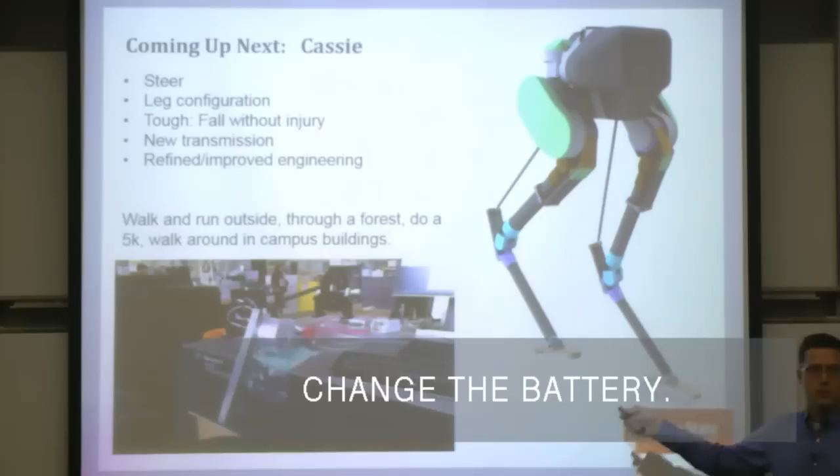The reason this works for us too is because we're a lot more comfortable now diverging a bit from the ideal spring mass model. ATRIAS was supposed to be the perfect spring mass model. This is not. It's off a little bit, but I think it's definitely close enough to capture what we want to capture. And we've also made our own transmission.

So this part right here is electric motor. This part here is transmission. That's a 3 kilogram steel bar on our prototype system bolted to a table. So it's got some, I mean, that's faster than I can move my arm. And it's at 1/7 peak torque right now.

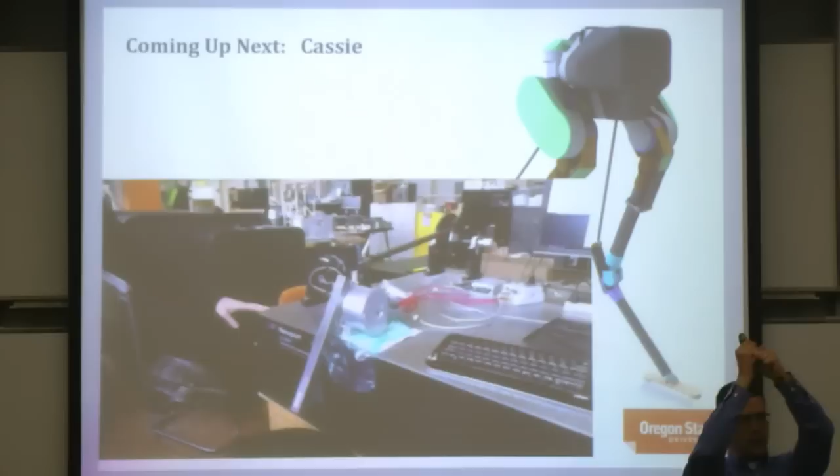Okay, that was just a huge safety violation. Should I not show this video? Yeah, we also had him hanging from it and it lifted him up. That's got sharp edges. We sanded it off a little bit. It is made of iron. I mean, it is kind of a hard thing. You wouldn't want to, yeah.

Okay, moving on. So how do I take this out of the laboratory and create things? There's a lot of engineering behind it. We want to have actual engineers doing that engineering. The research stays in the laboratory, but development and so on goes to the company. So we've started Agility Robotics. Damion Shelton here, also a RoboGrad, is our CEO.

I'm the CTO. If any of you are graduating soon and starting to think legs are cool and you know dynamics really well and you're looking for an interesting thing to do, we'll have spaces in Corvallis in Oregon and we'll have spaces here in Pittsburgh, I expect and hope.

So where do we want to go? This is the big picture view. I want to change the retail economy. Now how do we get there? If you imagine FedEx robots doing the last, say, a fleet of autonomous cars and then the curb to doorstep delivery, all of a sudden it makes delivery costs 10 times less, and it happens within half an hour.

And now, why would you shop? Now there's so much less reason to go to the stores, everybody in their individual vehicles and taking all of their weekend to go shopping. You just Amazon it and it shows up on your doorstep within half an hour. I think that changes a lot about how many stores do we need, how much energy is used for all of that, how much does it cost, really cutting down on market friction, things like that.

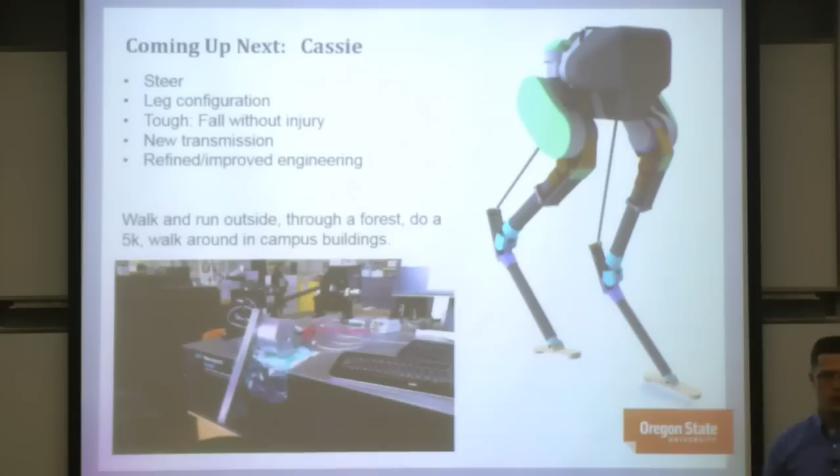Have you seen the videos of people wearing the spring leg, where you can run 40 miles an hour? It's pretty amazing—if you put some more springs on your body, you can really get some performance, and people are doing big flips and things like that. So if we wanted to optimize for that, we could. But I want a 60-pound robot that takes 100 watts, that can do everything a person can do and be in human environments. So I don't think we're going to be doing front flips, just because we're not going to try.

It's interesting that your new robot unintentionally looks like a bird. Can you share your thoughts on the structure of the human leg, especially being straight during stance, using bipedal? I think we are a local minima on the genetic optimization. I think we are grounded hairless monkeys.

Does that answer your question?

Birds come from a long lineage all the way back to dinosaurs. So if what you're trying to do is run well, maybe birds are a better way. Humans are pretty good too. It's hard to judge if they're better or worse, it depends on what you're trying to do. Humans are better at climbing a tree, that's for sure. I don't know, but I have thought about this in terms of why this configuration. This is what happens too if I don't understand feet, and I don't. I don't know how to do a foot yet.

With ATRIAS, I think about a spring mass model. It's a point foot. We add this just to prevent the twisting when we go into 3D. That's it, it's completely passive. It's a pin joint at that spot.

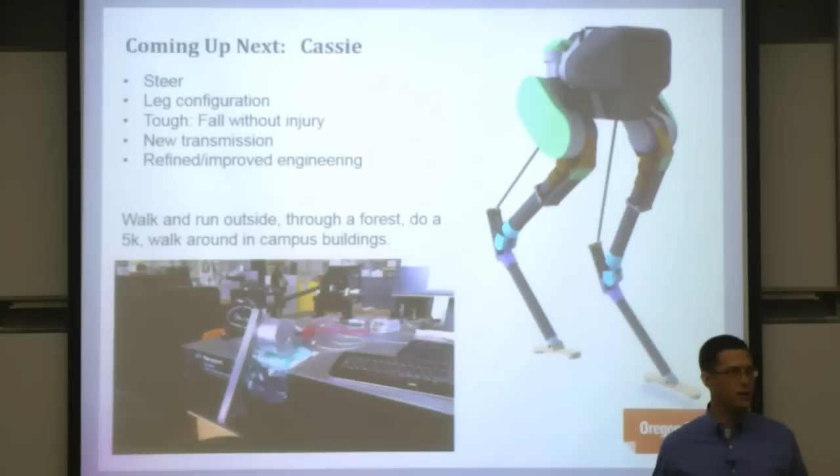One more question, then we can let people go. What do you think about recent developments in deep learning and walking approaches? That's a great question, I'm glad you asked that. When I was talking with Gill Pratt about this at the DRC, he was interested because he thinks people are going to make machines move and walk and do all the things using deep learning, and then it's too late, nobody will ever understand how or why it does what it does because you just hit it with the learning hammer and it worked.

I think that all of that stuff is really going to be helpful for fairly noisy, nonlinear, and difficult to model systems. So we're starting to think next about how do you do foot placement, how do you do planning through the dynamic space for this weird hybrid system, how do you go up and down stairs. Even if it's possible, and it is, to have a great model, think about the dynamics, plan ahead a couple of steps so that you, like a person does, are getting ready for the step on the stairs, you probably can't do that in real time easily on a robot right now.

Model predictive control, it's tough. But we can probably learn some really strong heuristics that are going to recognize a certain scenario and implement a kind of physics-based heuristic, very similar to the six points I described. I think that's probably similar to what people do, you've evolved or something, some basic heuristic to do that. And I think some of the machine learning is going to help us solve some of those problems.